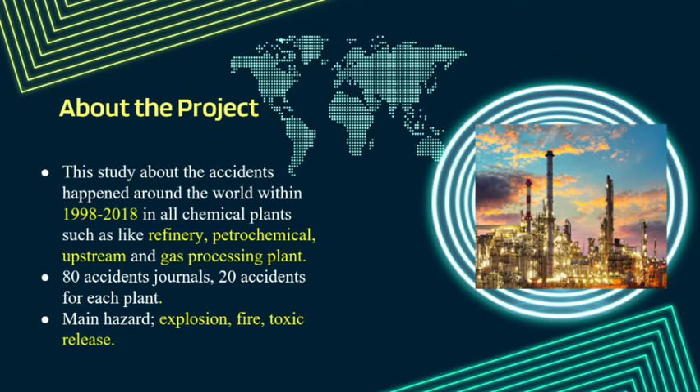There are 4 types of main contributors that lead to the accident, such as organizational error, human error, technical error, and design error. All accidents occurred may lead to damage of equipment, environment, and affect the large scale health and welfare of employees. Furthermore, lack of understanding, information, or legislation can also contribute to the accident.

The objectives of this study: first, to study the accidents in a few types of chemical process industry within 1998 until 2018. For example, the study on accidents occurred in petrochemical plant, gas processing plant, upstream plant, and refinery plant around the world within this period.

Second, to identify the type of hazard that occurred. Chemical process hazard can be associated with consequent outcomes of fire, explosion, toxic release, or a combination of these hazards.

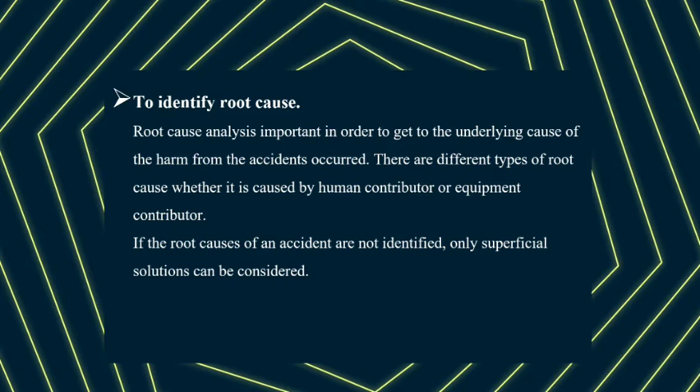Third, to identify the root cause. Root cause analysis is important in order to get to the underlying cause of harm from the accidents occurred. There are different types of root cause, whether caused by human contributor or equipment contributor. If the root cause of an accident is not identified, only superficial solutions can be considered.

Last but not least, the objective to rank the hazard. A priority ranking for each hazard of concern is assigned, whether the hazard is high risk, medium risk, or low risk.

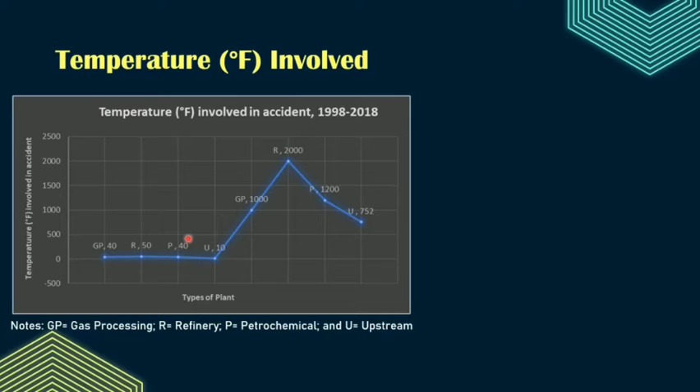This graph shows the temperature involved in accidents from 1998 to 2018, covering gas processing plant, refinery plant, petrochemical plant, and upstream plant. The maximum temperature is 2000 degrees Fahrenheit, belonging to the refinery plant.

This accident occurred in Washington State, USA on June 10, 1999. It occurred because a pressure relief valve failed, spilling 277,200 gallons of strong odors of gasoline when the gasoline vapor exploded.

The minimum temperature is 10 degrees Fahrenheit, belonging to upstream plant, with the accident occurring in Abkatun, Mexico in 2015. This accident involved the fire hazard.

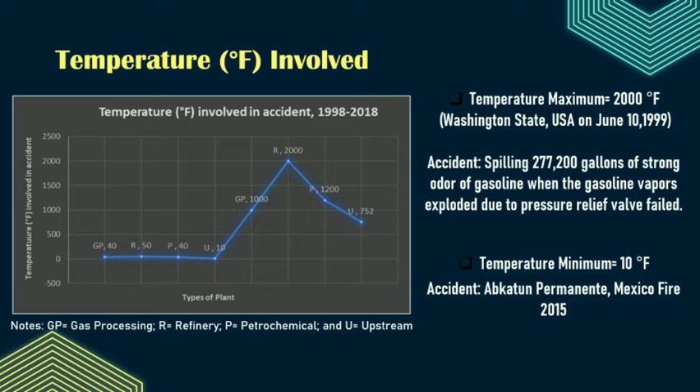We go to the NFPA of chemical. This is a bar chart of NFPA of chemical in accidents from 1998 to 2018. The total NFPA maximum belongs to ethylene oxide, which is 10.

The health rating of ethylene oxide is 3, flammability 4, reactivity 3. The accident happened in Ontario, California on 19 August 2004, where an explosion happened in an ethylene oxide sterilization facility due to ethylene oxide explosive decomposition.

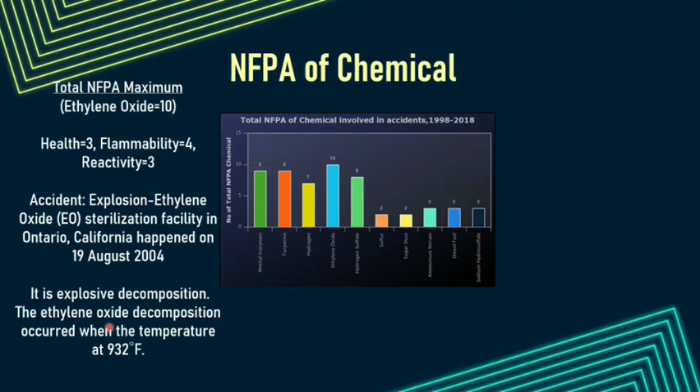The ethylene oxide decomposition occurs at a temperature of 932 degrees Fahrenheit. Ethylene oxide also presents an exposure hazard in addition to its high flammability, as it rapidly and completely vaporizes at atmospheric pressure and normal ambient temperature.

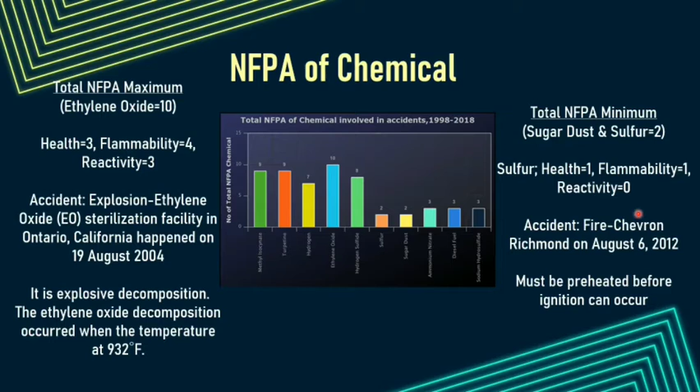Second, the NFPA value belongs to sulfur, which is 2. The health rating of sulfur is 1, flammability 1, reactivity 0. The accident happened at Chevron Richmond on August 6, 2012, where a fire hazard occurred. Sulfur must be preheated before ignition can occur.

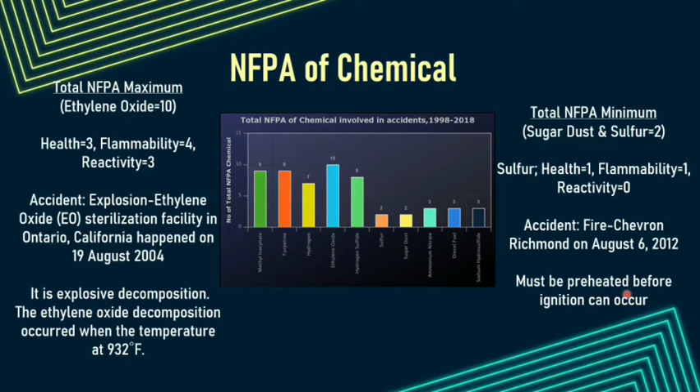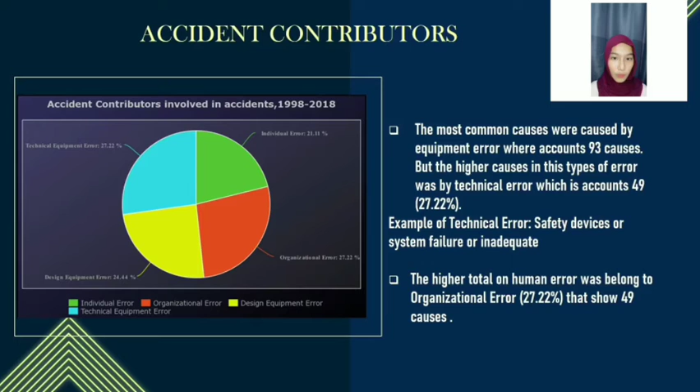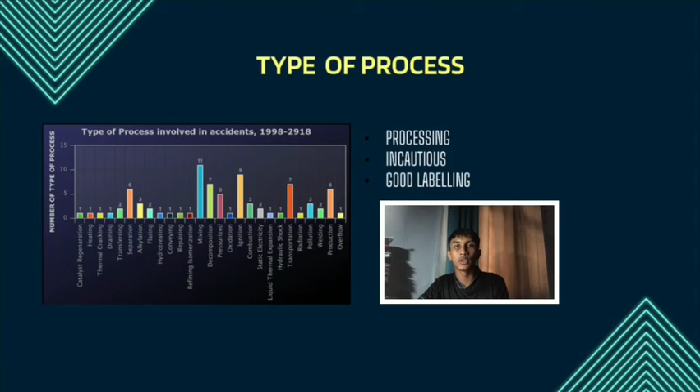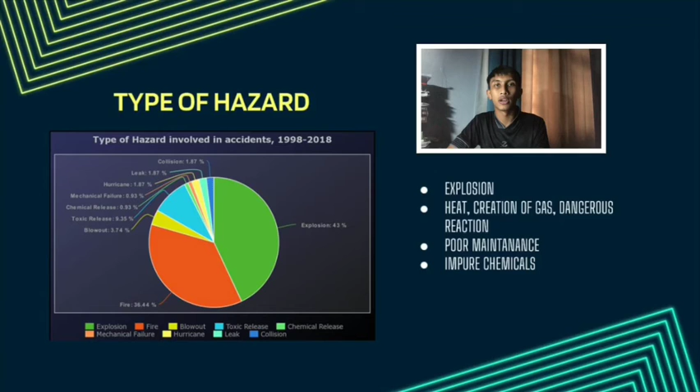When chemicals produce large amounts of gas in a short time frame, even those that are not generally explosive can generate an explosion. Heat and dangerous reactions are the cause of many plant explosions. Gas leaks, most often caused by poor maintenance, result in a number of explosions each year. When a gas leak comes into contact with a source of heat, it begins to expand and can explode. Sometimes, plant explosions are caused by the use of impure chemicals. Impure chemicals can produce large amounts of gas, which can trigger a dangerous reaction and ensuing explosion.

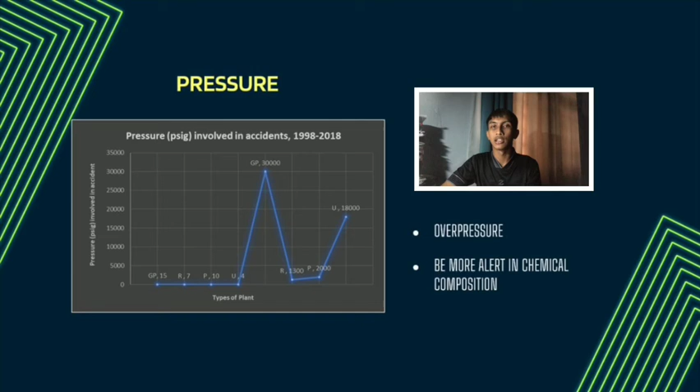Most of the accidents in chemical plants are because of overpressure in the equipment that leads to explosion or toxic release. The operator should be more alert about the condition of the chemical composition, especially the pressure, because pressure is very fragile to handle; it can easily go up and down within a second, and every little change in pressure would cause a different product. The highest pressure is recorded in gas processing plants, around 30,000 psig, followed by upstream at 18,000 psig, petrochemical at 2,000 psig, and refinery at around 1,300 psig.

For the conclusion, routine safety precautions are key. Most of the accidents were caused by negligence. Ensure safe working procedures and measures are in place, and be proactive and vigilant to avoid the reoccurrence of the accident.

Okay, so this research performed an analysis on a catastrophic hazardous chemical accident involving a domino effect, focusing mainly on its process condition, consequent causes, and accident contributors. This research gives a good lesson, such as knowledge about process safety accident analysis. So, the study of previous accidents is an efficient way of learning lessons to prevent similar circumstances from occurring in the future.

So, there are a few chemical safety legislations in Malaysia. First is Use and Standard of Exposure of Chemicals Hazardous to Health. The function is to register and control chemical hazards to health, so that chemicals are kept at the workplace safely. Second is Classification, Labelling and Safety Data Sheet of Hazardous Chemicals Regulation 2013. The function is to inform the management system about the hazardous chemical.